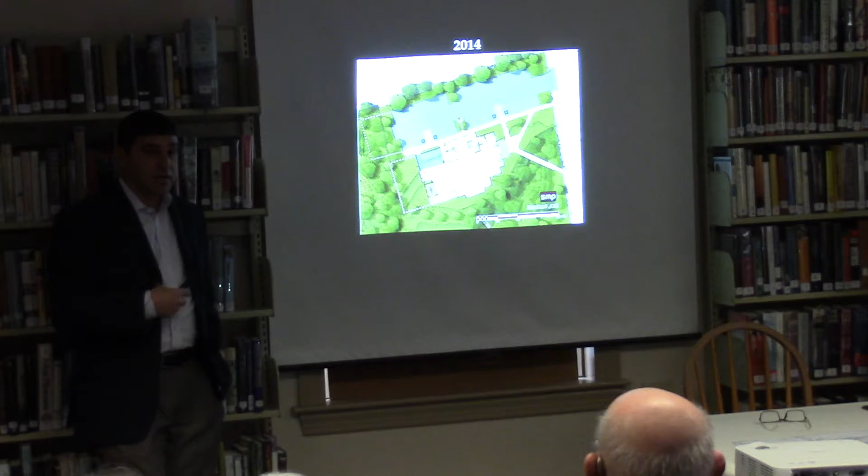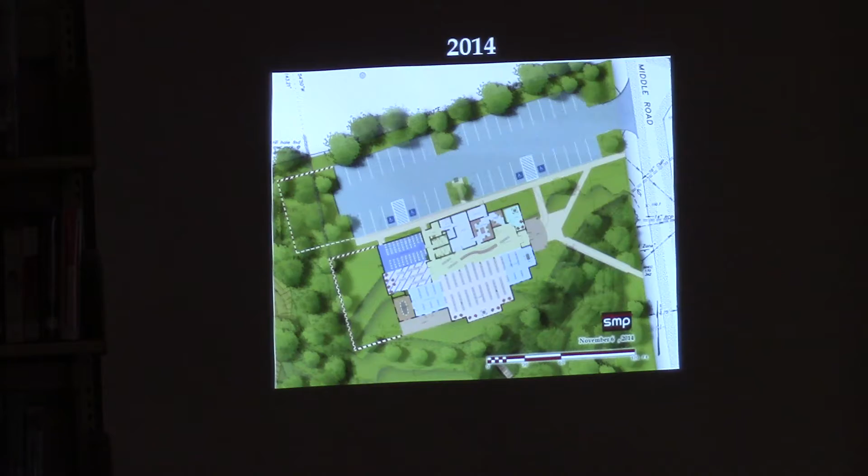Back in 2014, they interviewed and asked a number of architects from around the state, and we competed and were awarded the project to look at a new standalone building across the street on its own site. This was one of the options for doing a new facility over there. That was found to be a little too costly, and it did not pass at town meeting, as most of you know.

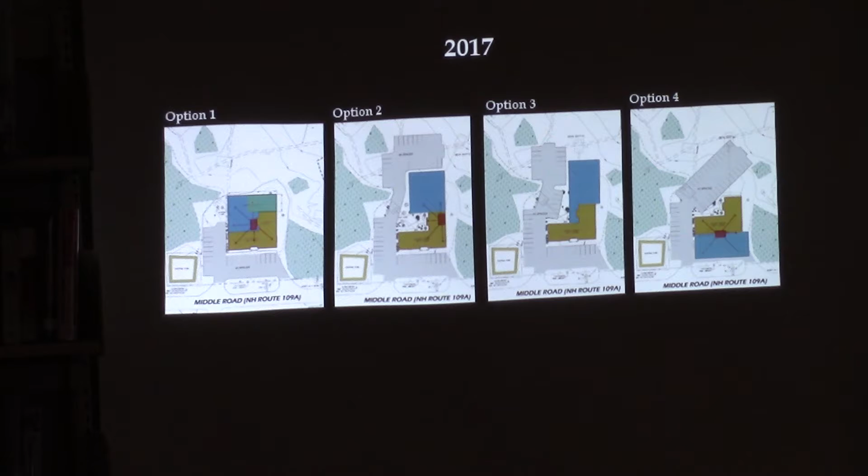So we then went back - that's another rendering and the pretty pictures of that building in 2014. Then the idea came up to go back to this building right here, look at doing an addition to it and renovating this space. So in 2017, last year, we were asked to come in and do some conceptual modeling to determine how this building could be best utilized to meet the needs, fit the program in the space allowable, looking at the site, and how the parking could work within the wetlands.

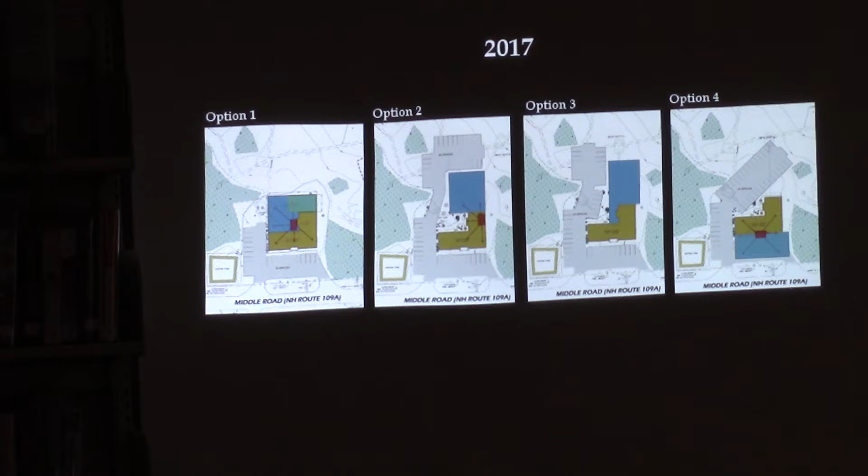So last year in the summertime, we came up with 5 options. We started with option 1, which was based on Skip's idea of kind of making a square, keeping one point to have line of sight throughout all the areas. And then we came up with 4 other options. The trustees decided and selected option 5, which is - this is the existing library here - to build a simple form, an easy addition off the end of this building, renovating this room that we're in, and then utilizing the existing building as best we can.

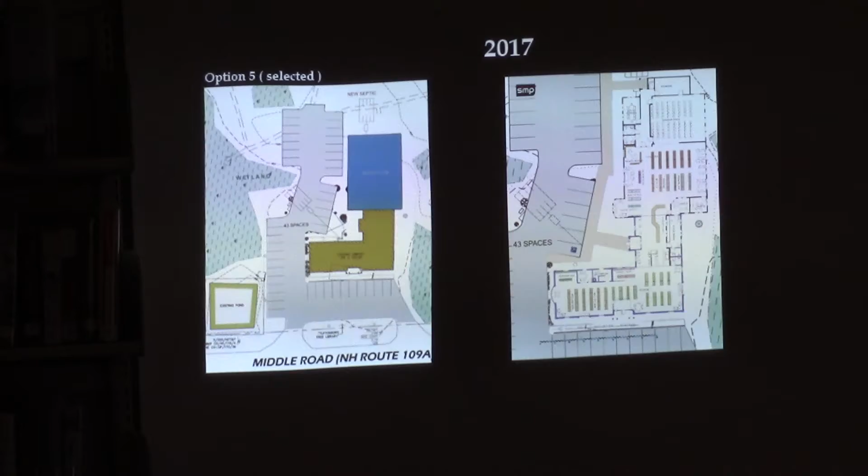That was the floor plan that we talked about. Staff weighed in with comments, how to adjust it, what they felt needed to be done for their collection. We tweaked and tweaked and tweaked and ended up with a project that is 5,180 square feet of new addition, and then 3,927 feet of renovation of this library right here.

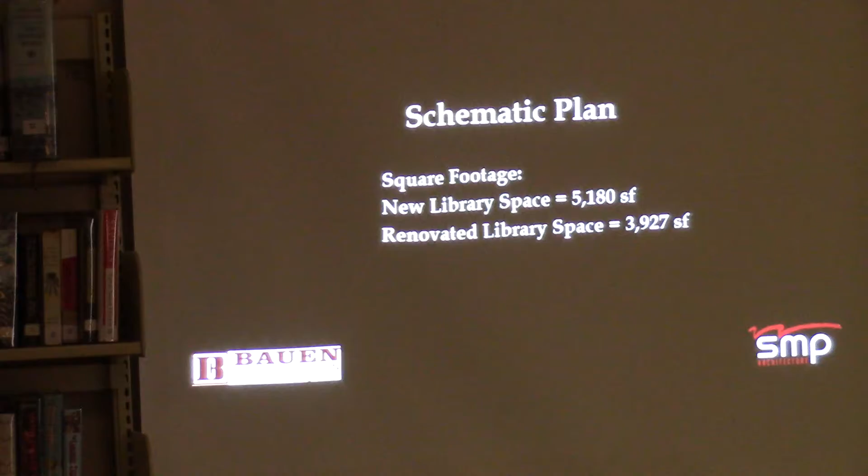Here is the schematic plan to date. We basically took that last rendering and developed it a little bit further, brought it into CAD and needed to provide Andre with a package of drawings that he could then put a conceptual budget towards. This shows there are things here that will likely not occur. We know we're going to end up having stacks around the perimeter as well, but this just basically shows the collection and arrangement that will fit, with a little area for future growth of the library's collection.

A much larger meeting room, program room. It has space off the side for storage, and there's a little kitchenette thing here. There's bathrooms, there's a small meeting room. Kind of the collection back of house, working on books. That's the reception desk. Then the entry will remain right here. We'll modify the exterior, make it a little bit larger so that you know that's the way in. So you'll come in through - here's the reception desk - you can go either direction.

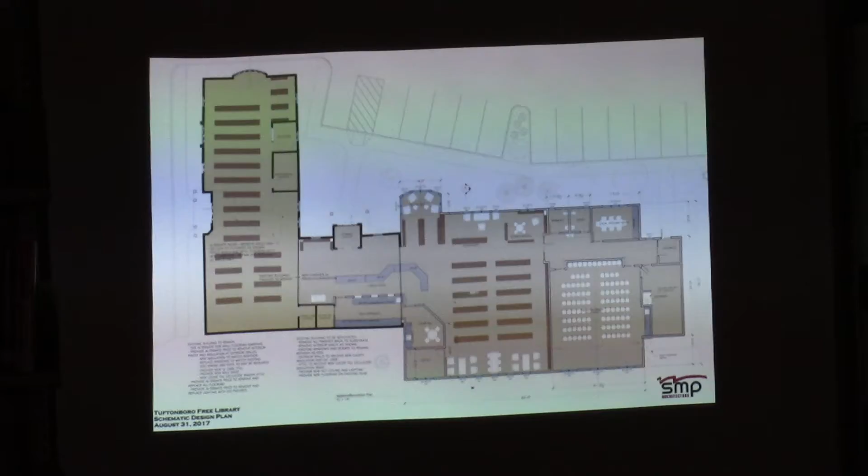What else? So one of the things that Andre did was outline some alternates that could be done with regards to renovating the existing facility, like replacing windows, doing repair work on doors, and swapping out all the existing light fixtures for high efficiency LED lights. And since we're working on things, reconfiguring items, new flooring - all of those was a pricing exercise of what a number of options would be.

We didn't know exactly where we would come in with the total project cost, but the trustees and staff chose some of those alternates to be able to renovate this area to bring it up to the same level that this new addition will be, so that when you're here it's new - you're not going through an area that's still old and worn and not up to the same quality level of the new addition. So they accepted those alternates and they're currently in the total project budget as we are talking about today.

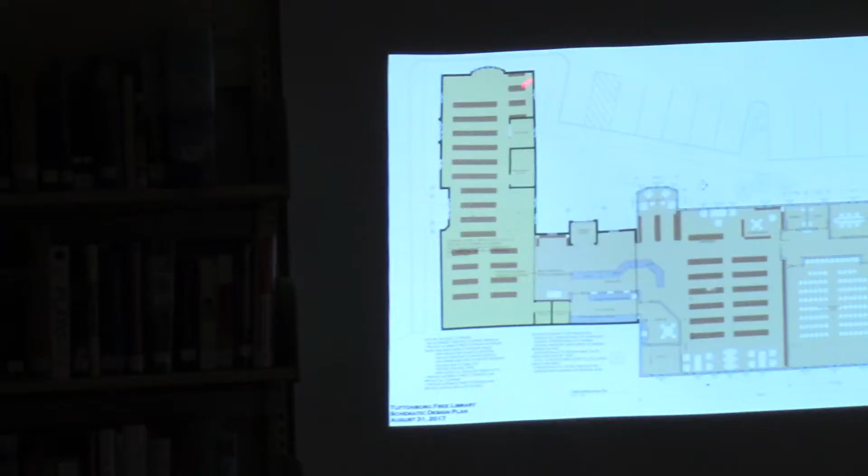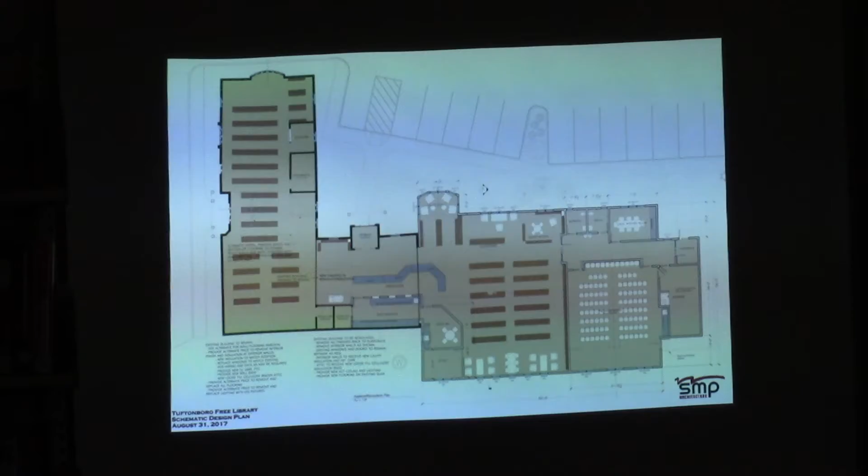So all new windows, new flooring, new lighting. And most importantly, over this area will be more insulation in the attic. So on the top chord of the trusses will be an R60 blown-in cellulose insulation, and that'll be consistent along the whole building.

Question - go ahead. It looks like you're doubling your books capacity? No, we're not, it's the same. We'll have a few new stacks, yes, so we don't have to shelve books that are 7 feet high. We've changed all our stacks out there because of space, to build them up really high. So what we will do is get them a little lower and spread stuff out some. And yes, there will be some new stacks too, but no, we're not going to double the size of the collection.

Is it a third more or? It was a third more on the last plan. I'm guessing it wouldn't be probably more than that, maybe less. What we really need is space for people, not so much for stacks, but for people. Right, that's what we're looking for.

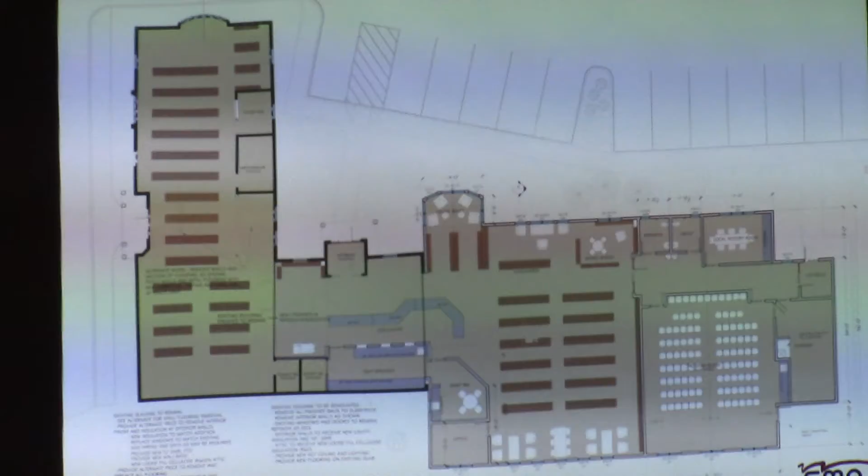The population is declining in town. The student population is way down from its peak. But last year there was a whole kindergarten class born - we just bought the newborn books from the Friends for them. I'm just going by the numbers reported in the school district statistics. There's also several dozen homeschool kids, and I think there are about 60 kids under 5. So there's a boom in the brand new ones coming in. We got a couple of babies in story hour and a couple of pregnant moms, so it's not stopping.

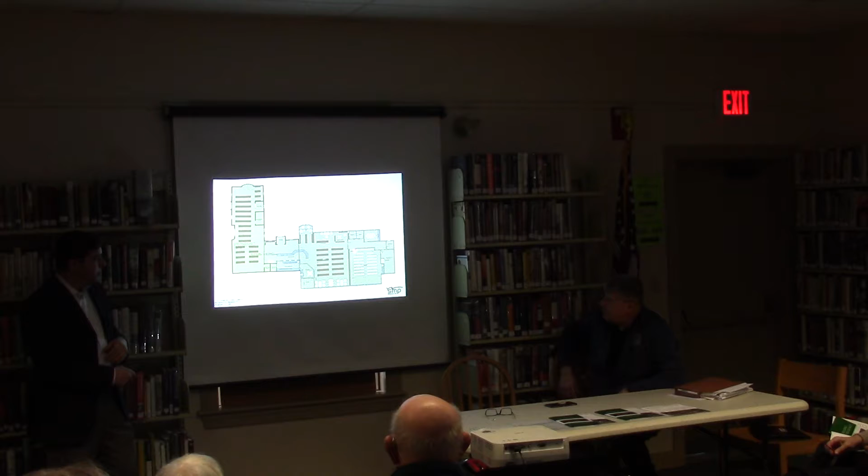What's the capacity of the large meeting room as laid out? I think it's 82, something like that. 80? 80, yeah, 80 to 82 - there are a few seats out to maintain egress paths. Thank you, about twice the size of this. Twice the size.

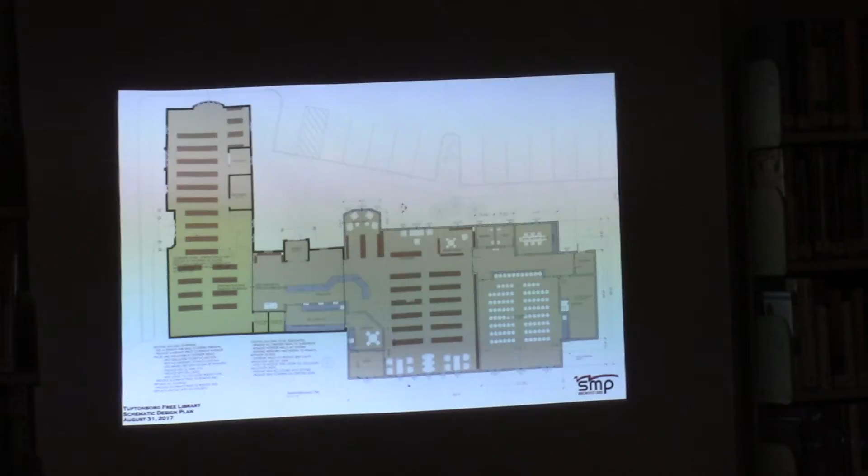The rendition shows solar panels - is that something that's included in the cost? Not currently. We intentionally are not pricing that out until we know that it passes, and the cost of solar panels is always changing, fortunately downward. So we have a general sense because Andre's priced it a little bit, but it's not currently in the price of the construction renovation project.

Can I just say something about that? We've also been speaking with ReVision Energy, which works with nonprofits and municipalities to find investors who will pay all the upfront costs for installation, because they get the tax break, and then we would still get the break on the cost of the energy - on some of it.

ReVision Energy is the outfit that worked with the town of Durham when we did their new library. We've fitted up and have provisions for a new array, and once the project was completed, they came in and installed the array not only on the library but on a number of municipal buildings in town. So it was one big package deal.

I have a question. Is solar going different formats? Is this a typical big glass panel, or do they have new technology? There are new technologies, but that's not our area of expertise. I don't know what they're looking at.

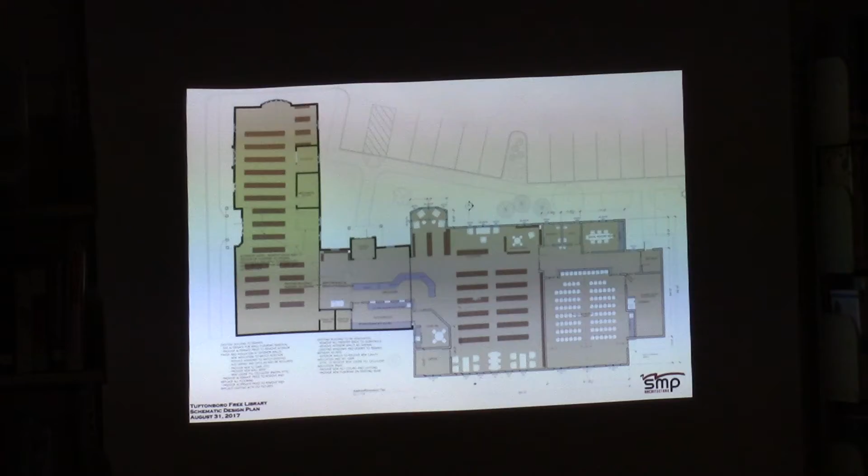Okay, any questions? I assume the school has a library. Is there some redundancy between the free library and the school library?

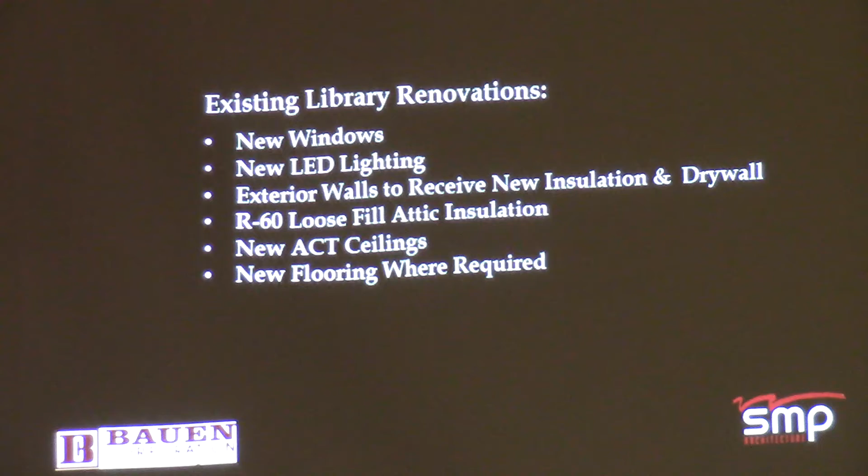Not really. The school library is specifically to support their curriculum. They have a lot of social studies books and books about countries that we don't have. We're mostly a popular fiction collection for the kids. And of course, the kids can't use the school library on weekends, vacations, or during the summer. They're also only allowed to take one book out at a time at the school library, so there aren't those kinds of constraints here.

I've heard it's mostly a media center. Yeah, it is. There are a lot of computers in their library, in their media center. So no, we don't do a lot of duplication. In fact, they borrow a lot of fiction from us for kids.

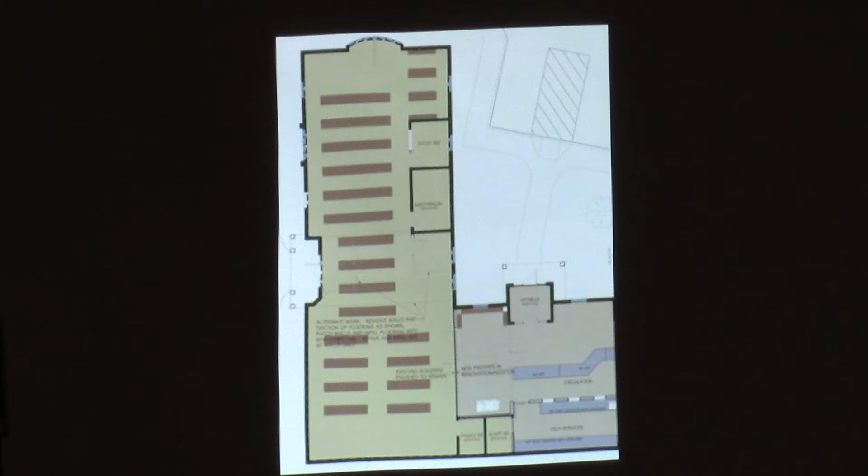I wanted to zoom in on certain areas because the main plan was large. I didn't know if it would be too tiny for everybody to see. So here's the existing library, which would be renovated, and the next is an enlarged view of the new addition of the facility.

So swinging back a little bit to when you had the various options, you mentioned that this does not impact the wetlands? Correct, we'll get to that too.

Okay, great, thank you. The current front entrance will be closed, is that correct? The current front entrance can be open, it can be closed. We haven't decided exactly what is going to happen there, but I think there's some money that's been set aside for that.

Do you need egress outside? Might that be a section? Emergency egress, emergency exit point in that part of the building. Right, it would be a crash bar, you'd just go out. You wouldn't come in, you'd just go out, it'd just be emergency. What we don't want is to confuse people about where the entrance is, which is why this becomes more of a focal point, and because it's a control access point. And then we'll have an egress out here, obviously. There's another door right here to get out and around. So we have the required distances and multiple means to get out.

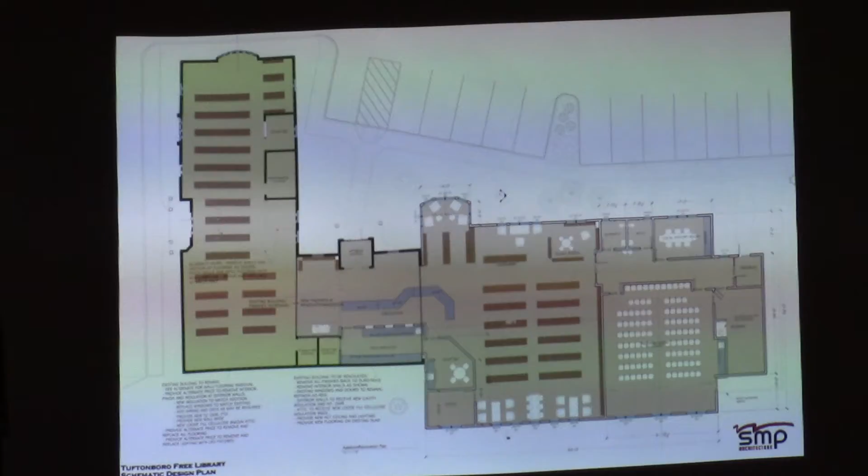So the advantages of this particular project layout are the access to the uplands. It has far more parking than what we had with some of those other options. The structure is really simple, being just a gabled building working as an addition, and it doesn't really affect this existing structure all that much, except for this wall. It's also easy to phase - we're able to build a new building, move into there, and then focus on this side, so that we have minimum impact on the library staff.

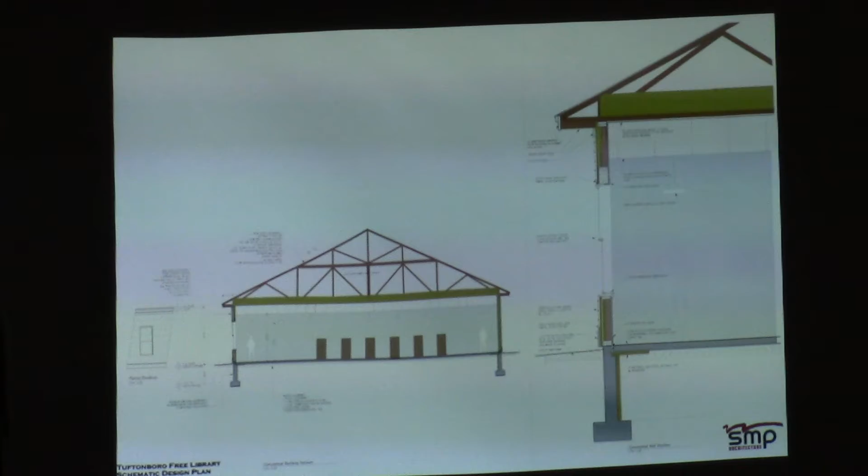The disadvantages are there's more perimeter and the distance of the control point, but I think we've dealt with that with the modifications we've had. So we did a simple building section and a wall section to show the different pieces, parts, and components. Again, this went to Andre to be able to put a good budget together. Having done this a number of times with your community, I know there are a lot of folks in town that are detail oriented, so I thought it would be helpful to show these, just to be able to talk through if there are questions.

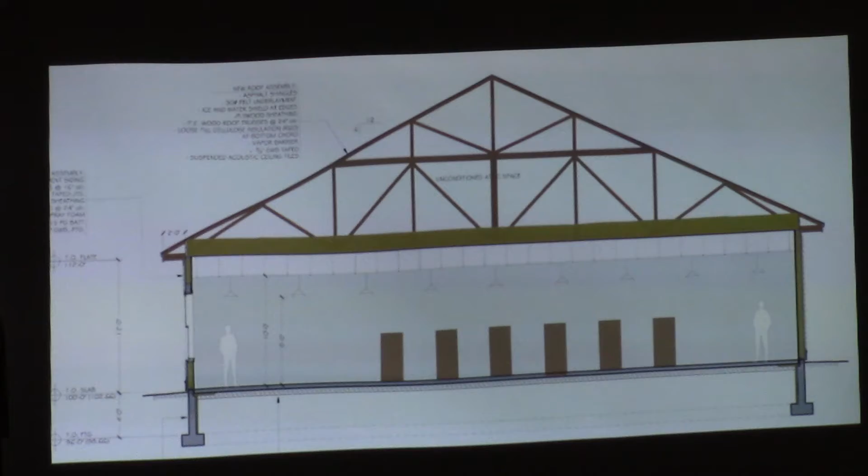That is the R60 blown-in cellulose insulation on the bottom chord. It will create a very nice energy efficient envelope on the new addition. The trusses will be a cold, unfinished area. Clear span open - there may be something structural in the middle in one spot, but we'll determine that as we go.

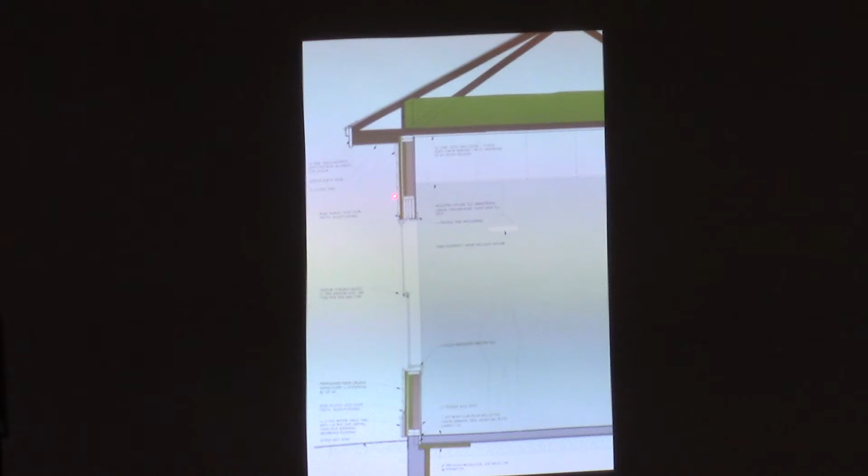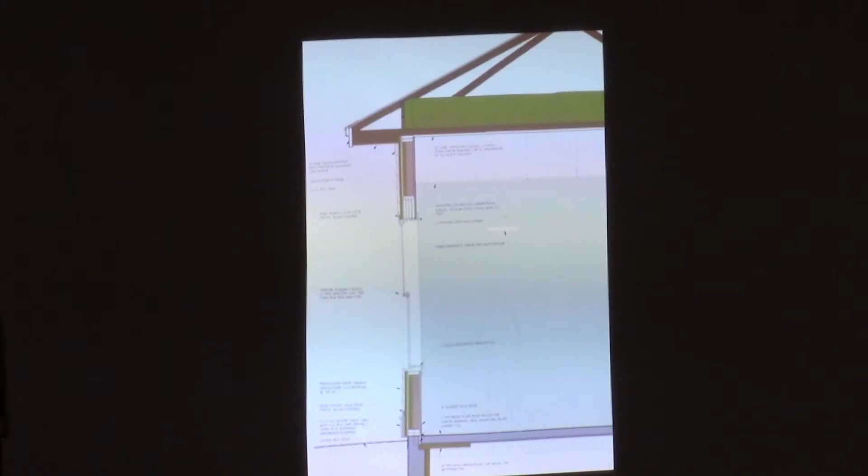The wall section itself is where all the good stuff happens. It's a traditional wall system, a wood frame building, so we'll have 2x6 studs. The envelope will be insulated with 1-inch rigid insulation on the exterior with cement board siding. On the inside, there'll be a layer of spray foam that acts as an air barrier and also provides significant insulation, and the rest of the cavity will be filled with batt insulation. So the wall assembly is calculated at about an R34 wall assembly, which is greater than the energy code requires, plus R60 in the ceiling like I've mentioned in the past. So the envelope will be very tight and efficient, which will allow the mechanical systems to be downsized.

So just some details, that's all.

Was consideration given to like a vaulted ceiling to be open? There are areas where we may be able to do that, but it then gets to be a cost issue. I think there may be an opportunity from this main entry in for a little bit of a vaulted space, but I think we can't determine that until we get into the details of it.

Can that open space up above eventually or at some point be converted for more space for storage? No, it's absolutely dead space. Yep, and we want to maintain that insulation, we want to cap the ceiling. I understand, it was just a question.

Okay, so we talked about the site. There was a survey that was done, and the survey outlined the areas of wetlands. A wetland scientist performed an analysis and provided a hand sketch with some areas, and we have copies of them here if you wish to see. There was some confusion between the two versions, the survey and the wetlands drawings, and when we did an overlay, they didn't align.

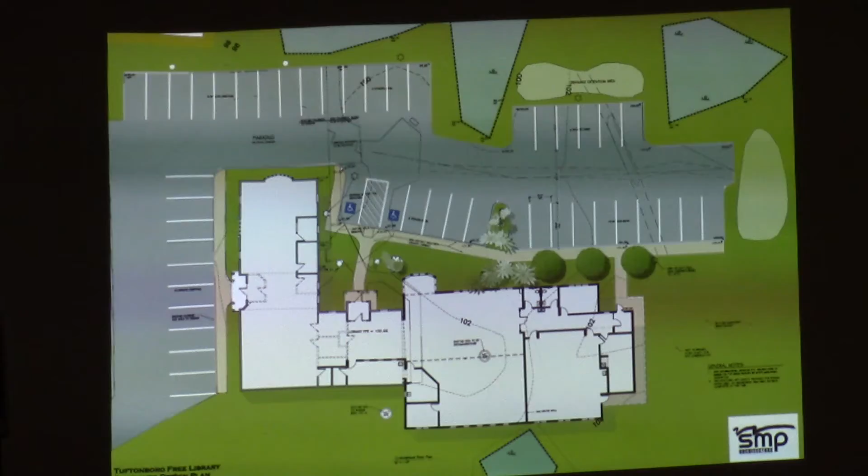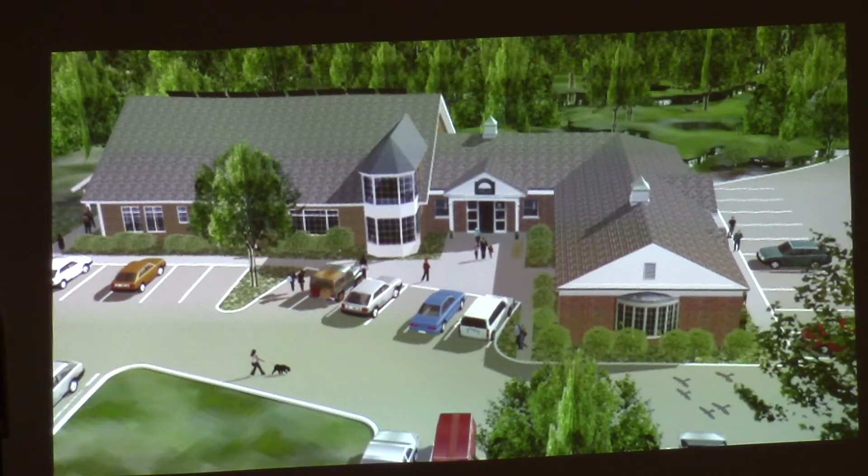So, a few images out of the model that was rendered - a couple are here, I just took some snaps around the building. As I said earlier, the colors haven't been determined. If changes need to be made, we still have plenty of time. This entry tower area can be modified slightly. There's a nice area for the solar array with the appropriate solar orientation.

So this is when I'm going to shift conversation over to the construction costs and let Andre talk about what the delivery method is planned to be with this project.

Before you do that, my understanding is the new portion will be radiant heat, correct? Under the floor, is that what we were thinking? I don't think we've determined that yet. I just wondered if you were going to do anything with the contract. It's something we're definitely looking into as an option.

One of the issues with radiant heat is it poses challenges with trying to anchor book stacks, because if you put a bolt into piping, it's a nightmare. Big problem. Okay, let's not.

It is radiant heat in this room, and the whole new addition is all radiant heat out there in the children's section. Correct, we've had this conversation. We know it's, but we haven't determined it as of yet.

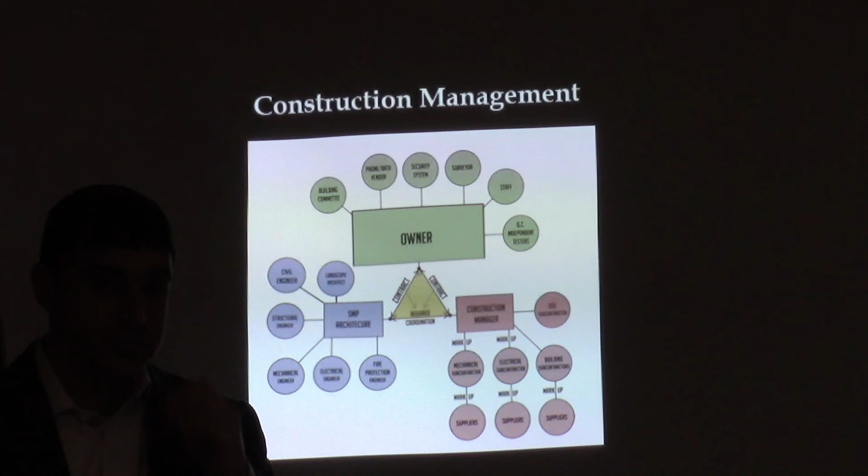There are a lot of people in this room actually who have been out there and had a look, and they're not certified soil scientists. It's not what it looks like to the untrained eye.

From our understanding, the wetland scientist that was used did not provide detailed renderings of exactly the location of it. When the survey was done, they showed the areas on the survey, the digital ones, and when the overlay was done, it was clear that it wasn't to scale.

It said it wasn't to scale, but the concerns that were voiced previously was that the major wetland was located a completely different area in the side yard. So we went with the survey and utilized the areas that were delineated on his survey.

I know, I can see exactly what was done, and I'm just saying this new one is not certified, that it's accurate for where the wetlands actually are in relation to the property. It's just a blow-up of Greg's original work superimposed on a new base map, and that's open to question.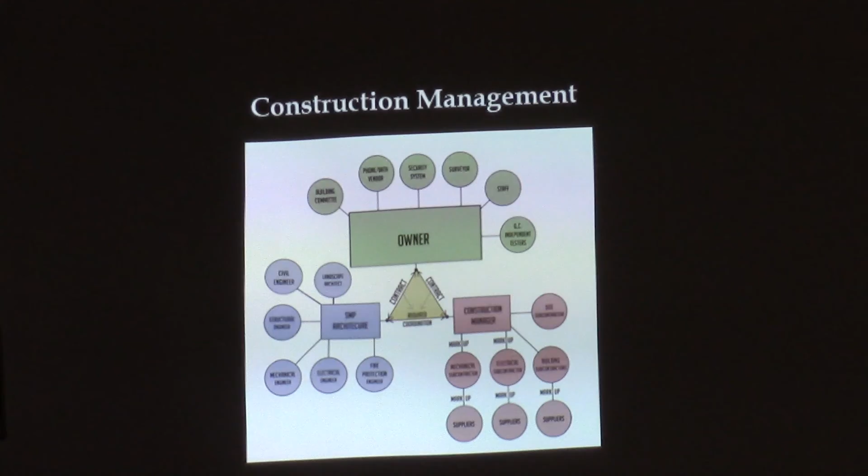I was just going to simply ask, can we go back to White Mountain Survey and raise the question that she has raised, and say there's somebody whose challenge is what information you gave us, and they will have a response from it, I would think. So I would go to the trustees who engaged with them to begin with.

The long and short of it is, as you go through your construction period and your planning period, when you get your engineers involved, you're obviously not going to build a building that's going to invade wetlands. That's impossible. So the big question is, if you get to that situation, you should be assured that it's not an obvious problem. But when you get into making test borings and all the other things, that's when you make your field decisions in terms of what you're going to do.